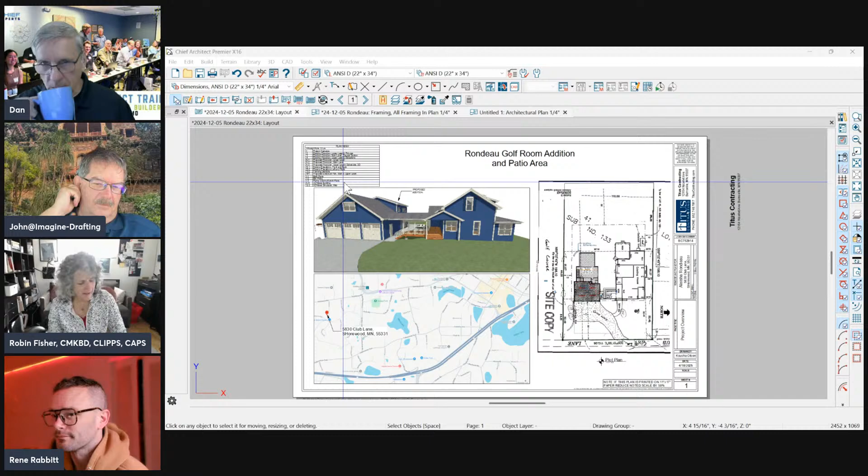All right, what's new with you guys? Robin, you're going to be updating the NKBA guidelines? We created the new guidelines and now we're going to be updating them. So that's going to be fun, I'm excited to get to do that again.

Nice. Rene, what's going on in your world? Just working on all my product stuff for X17. Have you heard anything about when X17 might be around? Not that I could say.

I do want to let you know I've been using your shower. Rene has a new shower system thing - have you used it? I have been using it and I really like it, so thank you, it's really cool. I'm doing two bathroom renovations right now and I started using it, and it's like, yeah that's really nice. I think I have to raise my rates again, you guys - it's making it too fast.

I'm interested to see when someone starts getting into something a little more custom than the out of the box ones. But out of the box, you can get them pretty custom. Cassie has them too, I wonder if she's played around with it. Give it a couple weeks, see if people start using it. That's one of those ones where I used it and I'm like, it can't be this easy, right?

Cassidy, nicely done, it's really cool, it's very nice, I really like it a lot. So thank you, Rene, cue that up and you can show that a little bit later, okay? Sure, yeah, that'd be cool.

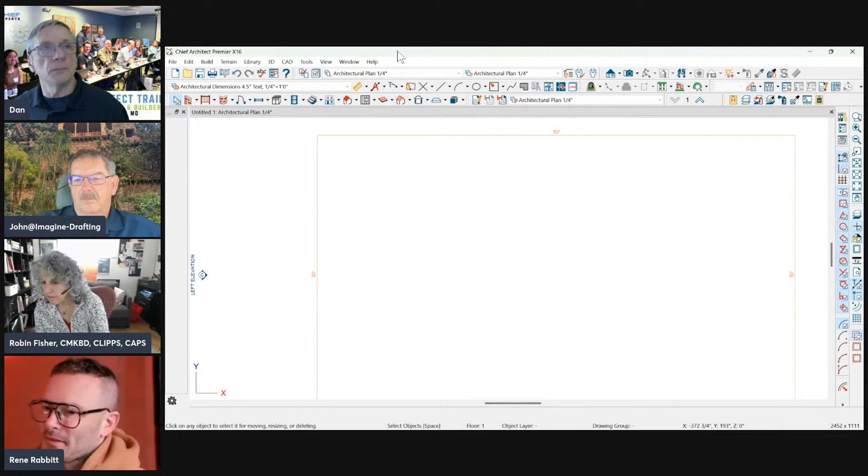So when you open this, can I interject on that? Absolutely. I make digital assets, I sell them, I have an e-commerce site. So yeah, I will tell you, it's really, really difficult trying to budget how many hours you're going to put into a development cycle of a new product, not knowing how many people are going to purchase your product for the next year, and if it's going to be a sustainable practice, or if you need to supplement that with some other source of revenue. So I think that the subscription model is extremely ethical and almost necessary.

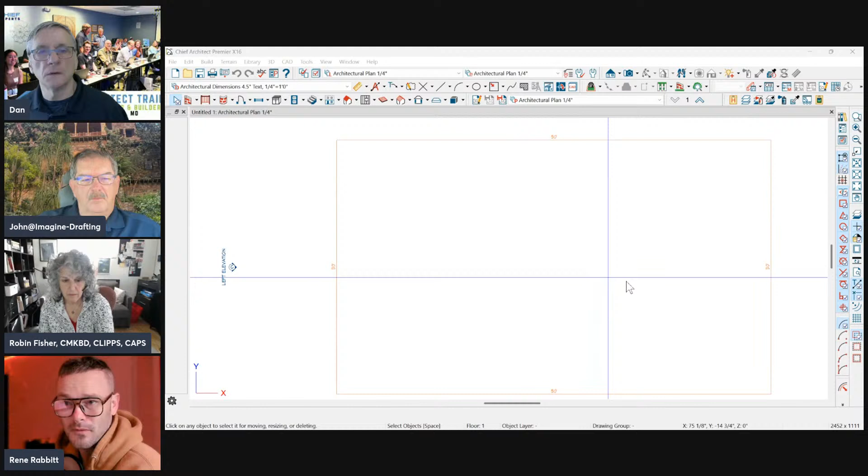And I'm a big backer of that because I don't charge a subscription, and it's a real challenge figuring out how much time I get to spend making my next products. Yeah, and you do make a lot of products. So yeah, you could just totally lose your butt on it.

So as a company grows, like Chief Architect's been growing, and they're trying to develop cloud-based stuff, which we've all been asking for, they need to know what's your user base. Anyways, carry on. As we all know, anybody that's been to their events and listened to their leaders and the people involved in programming, they've got one hell of a good company and a lot of great people, and they're really producing a good product. As far as we know, there's no indication that they're going to ever go anywhere. It's a privately held business. There's no reason to believe they're going to do anything else.

So let's hope that holds true, and we'll see what happens. In the meantime, they keep putting out a good product. So when you first load Chief Architect, you open it the first time and you'll see what's called the dashboard.

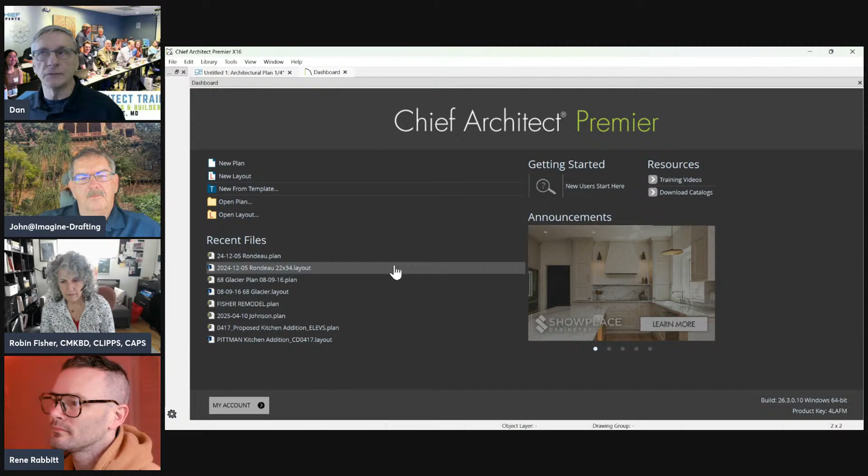This is a place where Chief gives a chance to put some information, help videos, training videos, things like that, or catalogs you can download, the symbol libraries. They'll show different things coming up with their announcements. So it's a good little dashboard to find out what's going on with the program. Plus, you can get to opening new plans and have a list of the projects you've been working on show up on the dashboard. You can adjust the numbers in the preferences of Chief on how many you want to show here, and whether the dashboard appears or stays after you open it. That's a setting in the preferences; we won't go there right now.

So once you get it loaded and open up a new plan, Chief has two kinds of files you're mainly working with: plan files, or .plan files, and layout files. They used to have them abbreviated from the old DOS days, but now they just spell out the whole word.

Just to give a reference for people using AutoCAD, and I know it's not for a lot of people here right now, but for anybody listening: a plan file in Chief Architect is what model space is in AutoCAD. So your .plan is the same as model space in AutoCAD, and layout is the same thing as paper space in AutoCAD. Just think of it like that. But they're two separate files, as opposed to being all in the same file.

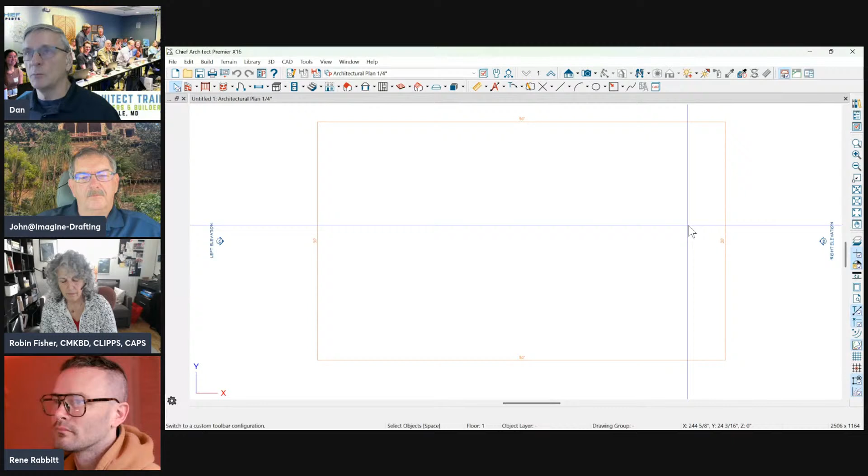And by the way, when I say Chief is a very full-featured, robust program, it'll go head to head with AutoCAD all day long, no problem there. So if you're an AutoCAD user and you want to get out of that program and just use Chief, we'll help you with that. We've done it with a lot of people. So don't worry about that.

So when you open the program, you're going to see some toolbars that look like this. This is called Chief's default toolbars. You'll have two rows of icons across the top, one row over here, a blank space down here, and a blank space over here, which will look more like this. It's going to be a little bit wider, I believe.

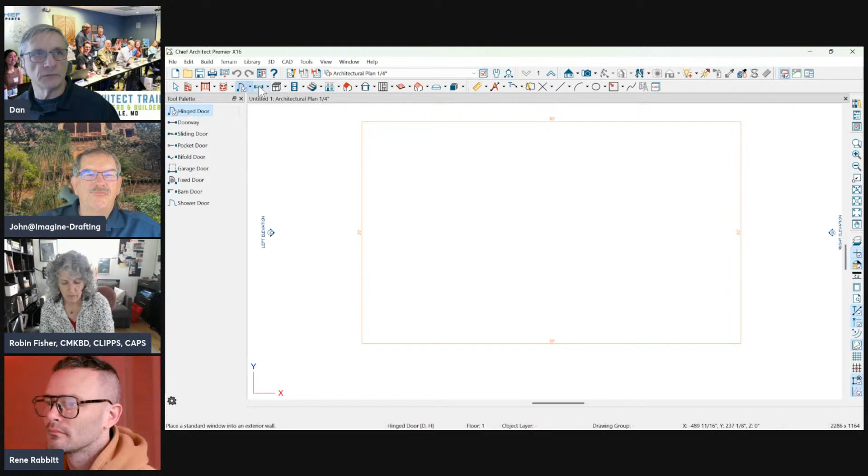So when you click on an icon, you're going to see what are called the child icons on the left side of the screen. We call them icons, or you could call them buttons, either way is fine. You'll notice you get different types of items showing up here on the left side. What I just did is click this little gear icon down here, and you can turn the words off at any time and just have a grid view, making it take up less real estate on your screen. So you can have it either way.

I like that Chief gives you that option. So if you're brand new to the program, it's a good idea to leave that list showing so you can see what the different icons are as you click on them.

I've set mine up in preferences to get a drop down. You may not have that out of the box. If you want to do the drop down setting, go to preferences—that's this little icon with a P on it. Then go to this setting where it's either child palette or drop down. I prefer drop down, but beginning users might want to not do that.

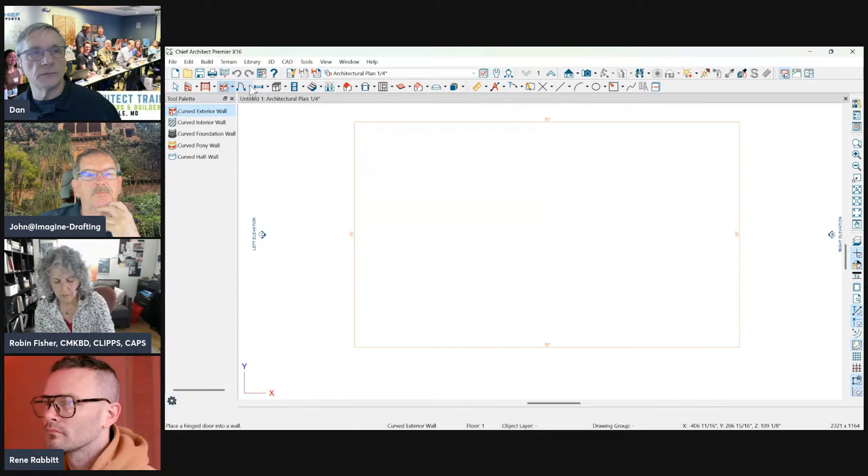It depends on your comfort level. The only difference between the two is that if you do the drop down and choose a different icon from the list, you'll see the icon change up here to match the items on the list. So if you're working on a plan and want to find a door and the door icon's gone, for new users that's a little confusing. But after you learn where the icons are positioned, it's not a big deal either way. So I prefer drop down.

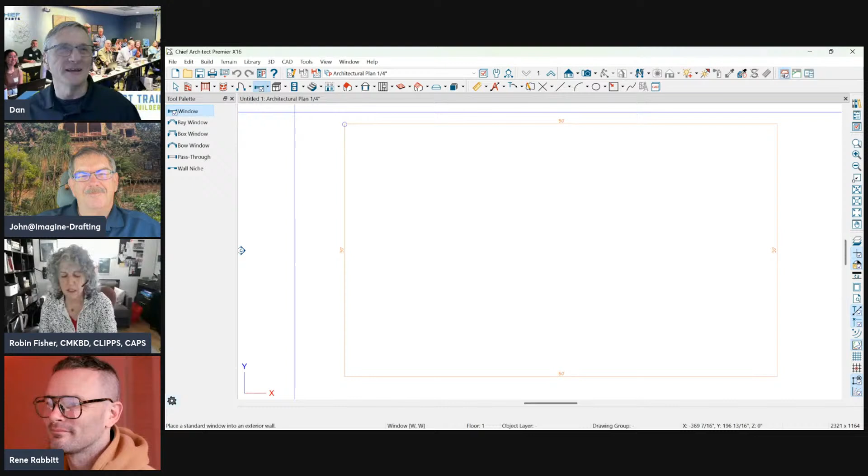So again, personal preference—that's why they call that little icon preferences. Keep that in mind. Preferences change how the computer works. It does not change how the plan works or where the drawing space is. It just changes how the computer works, how colors are, and how Chief works—not your computer.

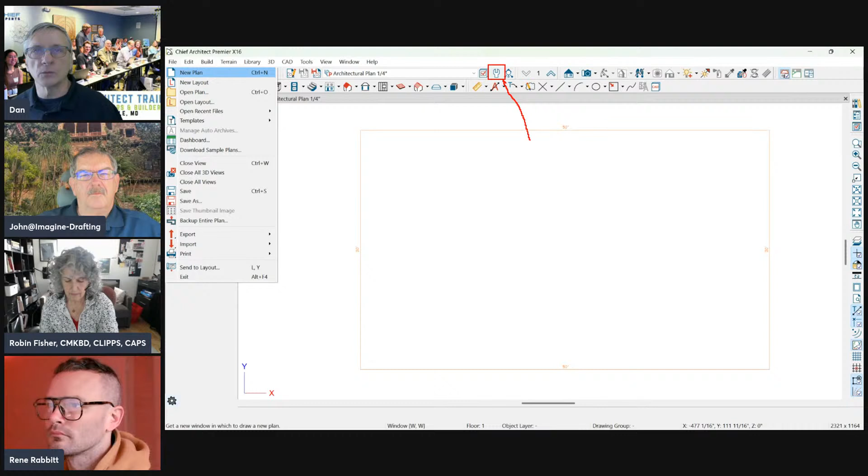It's how Chief works, but it doesn't affect the drawing of the project you're working on. So whenever you open a new plan in Chief Architect, whenever you go to File, New Plan or Layout, you're actually opening up a copy of a blank plan. In that blank plan you'll have a bunch of defaults set up. This little icon that looks like a wrench is a place where we can set up defaults for the plan we're about to work on.

Defaults would be things like what kind of cabinets do you want to put in, what kind of walls, what kind of siding, what kind of colors. All those different kinds of things are called defaults. There's a whole list here of defaults that we can change within the program, and each time you open a new plan, you're working with the defaults just for that plan.

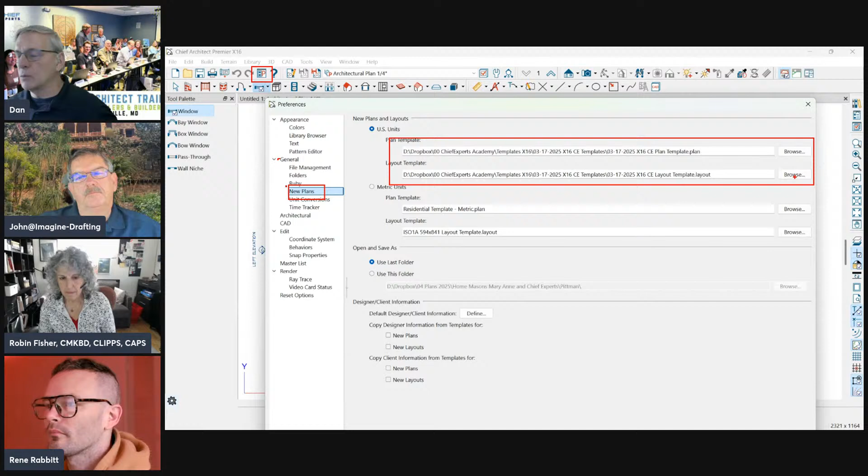You're not doing anything to the past plan, because a new plan is a copy of a previous plan, and that's set up under preferences again. It's really easy to see what you're working with when you go to preferences, under general, new plans. When you click open new plan or layout, you're opening a copy of whatever's listed here.

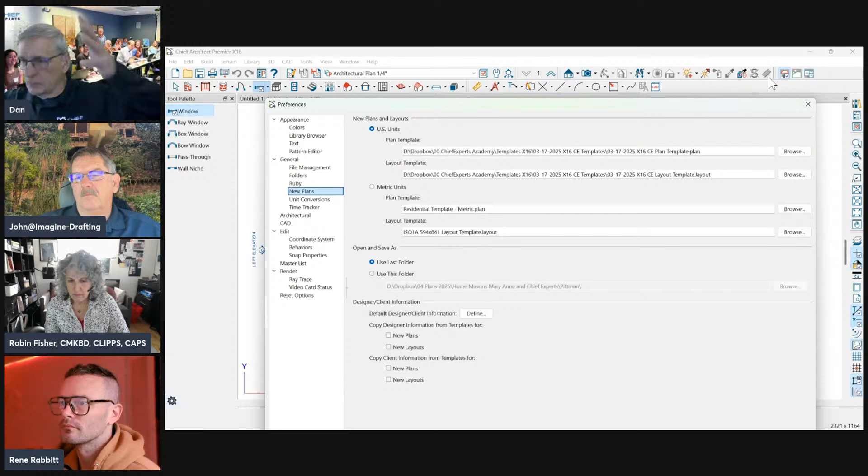So it's just like if you worked on the Jane Smith plan the other day and liked all the settings you had in it—you open that up, make a copy, then delete everything and start drawing. All the defaults are there, all the settings are there. You just made that into a template. That's all a template is. Templates seem to confuse people, as if it's some big magical thing, but it's nothing—it's just a copy of a plan with default settings changed.

So preferences affect the program, defaults affect the plan. Back to preferences for a second.

If we click on this little icon, a couple of things I like to teach new users right away: we want to get used to using the mouse the way it should be used in Chief Architect. The number one thing is you use your left button to click and draw things. Number two, you use the right mouse button to select things and draw things. You could use both buttons, but if you get used to the right mouse button to pick things and draw things like walls and lines, it makes it a little easier. So we're going to turn on this little setting right here.

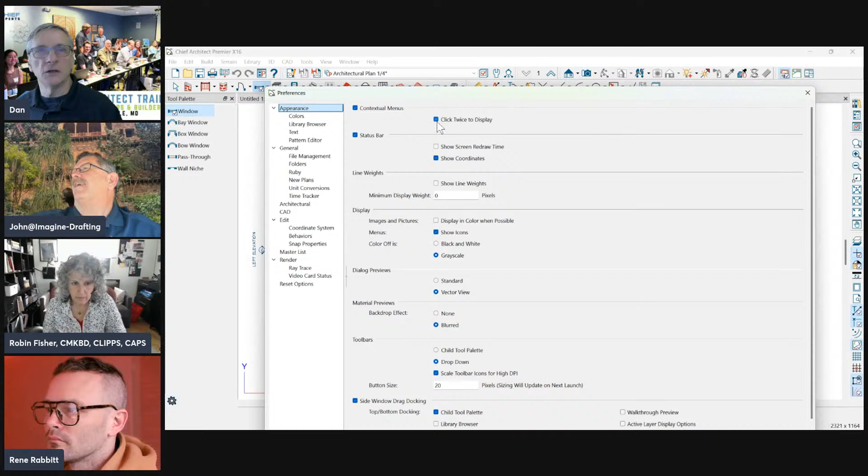Click twice to display under appearance, and when you do that and start drawing and click on something, in Chief the right mouse button is called the pick button. It's used to select things in your plan.

So when I open a plan, let me open the one I just had open here. When I want to select something, I can just click on it with my right mouse button, and I can pretty much select anything I put my cursor over without having to change and select a different mode to click on. So if I'm in window mode working on windows, I can only left click on existing windows or left click to place a window.

But I can right click on anything at any time. So if you get used to using your right mouse button to do that, and then click twice to display, it gives you what's called the contextual menu. This menu is the same as the icons at the bottom of your screen. So we right click twice to get to this menu.

I don't use that menu very often because most of the time when I select things, you're selecting it to dimension it, to move it, to delete it, to copy it, to do things like that. Sometimes this menu gets so big and it's in the way, it's just extra work to use that menu. But if you're used to using it, keep using it by all means.

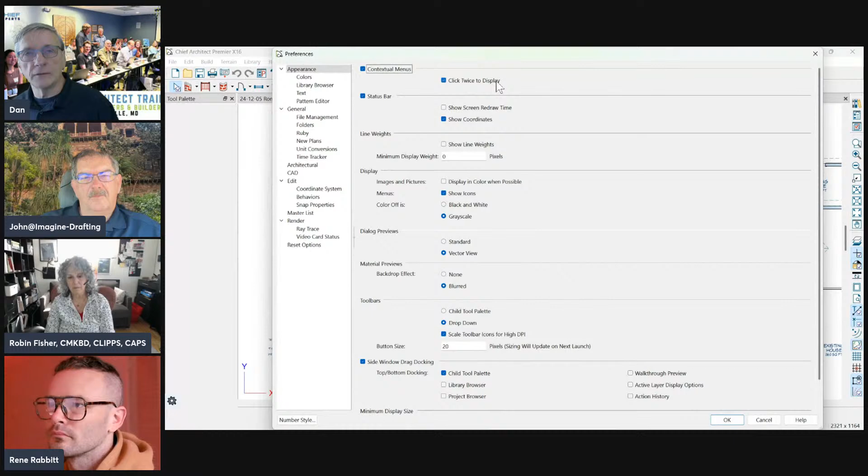So that's the one preference I like to have my students change. Button size - if you're using a real high res screen like a 4K or 8K and your icons, the buttons are really tiny, you can change the size of them to fit your screen better. Just make that a bigger number. You'll have to restart Chief to do that.

But you see how I have all my buttons kind of fill the whole screen here. And if you get them too big, they'll flow off the screen and you'll get these little double arrows. You don't want to do that because then a lot of the icons are hidden. So make it just big enough to fill your screen.

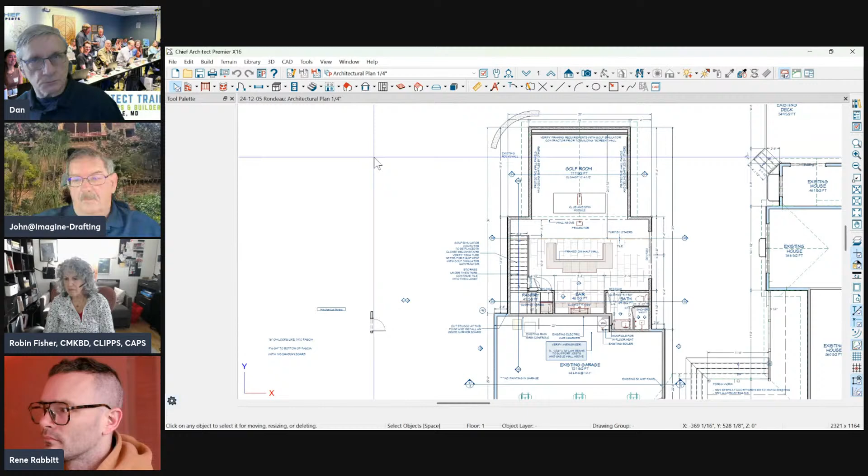Another quick thing here is colors of your handles, and this will be the last one I cover in preferences today. These colors right here are called the handle colors and the fill color. Then we're going to go to edit and change the handle size. So those two things make it easier for a new user to draw in Chief.

So let me just close out of here. If we go open a new plan, when I click on something, you see I get these little handles all over them. My handles are a little bigger because I've changed the size in preferences under edit to a 6. I think usually it's a 4 when you open Chief. I've changed it to a 6.

All right, try a 5. I have people go up one number and it's usually a little better.

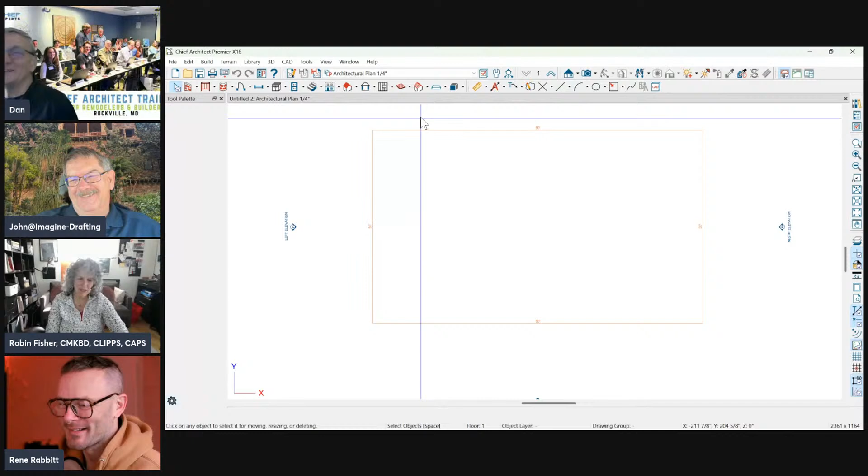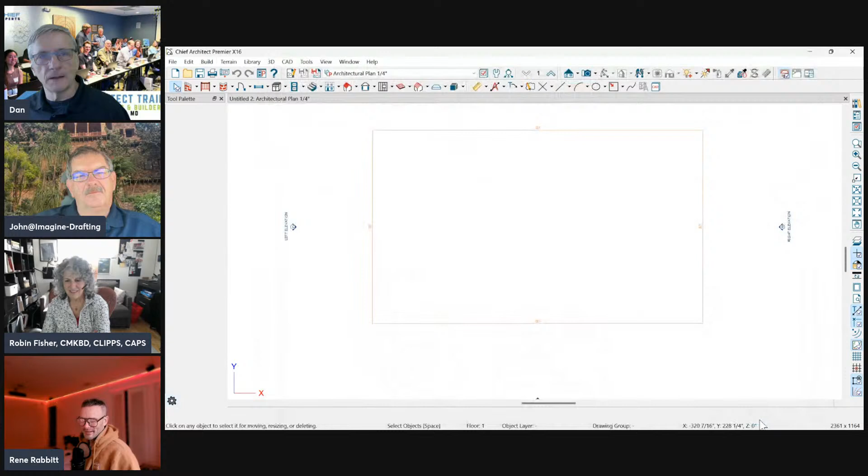And I change my colors all the time to different colors. Why does that not surprise me? You're a colorful guy, I do it too. I change it based on my mood - sometimes greens, sometimes purples. Yeah, I get bored, you want them to be pretty. You could always do the different colors here too, do the custom themes, although those are horrible - that won't affect the handles, but some people, if the screen's too bright for you all the time, just change the theme a little bit, or you can change different parts of it too. Yeah, their provided themes are pretty bad, they're really ugly, they're hard to process. Yeah, I tend to just run with the default theme. That way everybody else in the world that I'm showing Chief to is probably set at that too, so it's not confusing people.

All right, so in the toolbar setup, another thing I always have my students do is I have them right click on an icon.

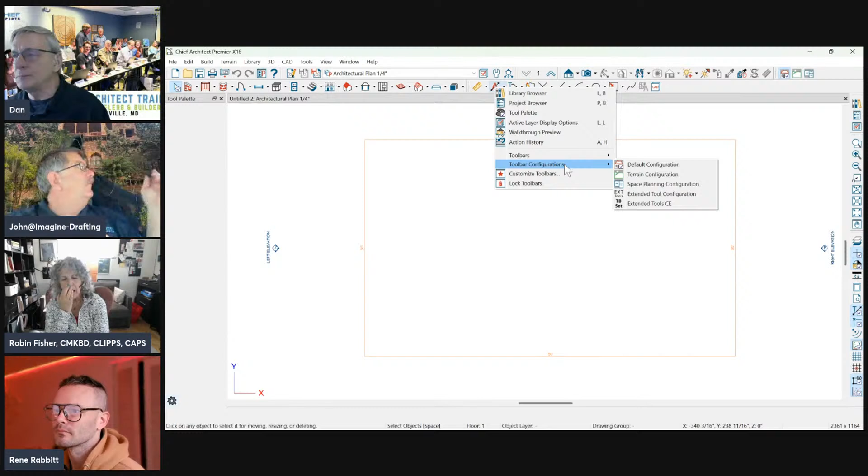I know Robin's going to say she uses this toolbar because it's more basic, and I agree with that. It is more basic, but I don't use that one. I've modified it, I have my own. I've kept some of the tools you add on it, and added more tools that I use on a regular basis. But that's not the thing we want to do for brand new users of Chief.

So I'm going to switch to what's called the extended tool configuration. You right click on an icon, go to toolbar configuration, then extended tool. I've created my own extended tool, and the only thing different between mine and Chief's default is I've added these icons that I use all the time. We'll talk about that another time. Just choose the toolbar extended, and it gives you more of the icons you use regularly.

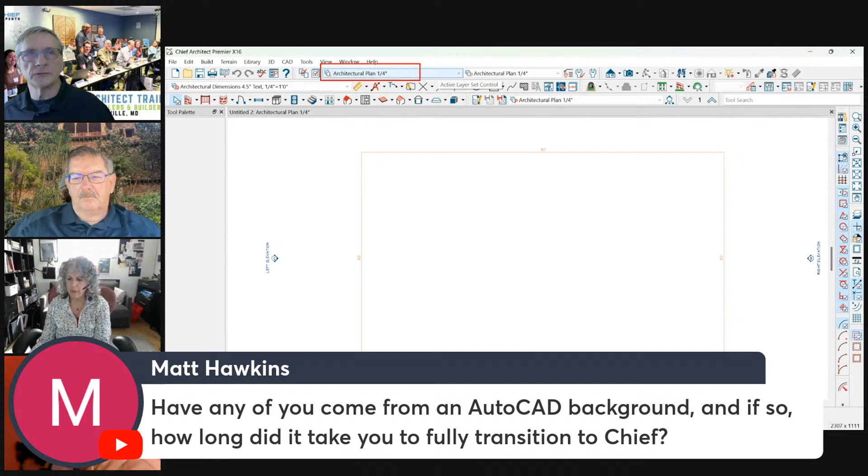It's going to eat up a little screen space, so your real estate will be a little less, but if you get used to this system, it works pretty well. The thing I like about it is it gives us these three drop downs: our plan views, defaults, and layers. We'll talk about what those are in just a second, but these are the things we use to switch around in our plan to do different things.

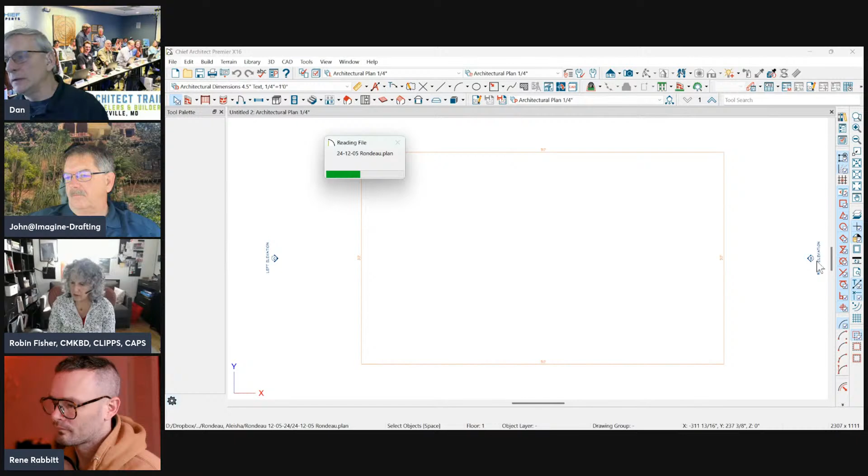Now with those three things in mind, let me go open up a plan again. One of the things I think is really confusing for people is they get into Chief and start working on things. Ben, mute yourself, you're clickety-clacketing.

One of the main things to understand about using CAD software, and this is true for any CAD software, is you're going to draw your entire project in one plan file. You're not going to have different plans, not going to draw the footprint of the house and make a copy to add the electrical, then make another copy to add the framing notes and details. Everything gets done in one plan file, so as you update things, everything stays part of that file and you're not messing around with different files to get different results. So keep that in mind.

So here I'm just clicking through the different kinds of views in my plan. I'm going to work on my architectural plan where I add notes and call-outs, then I want to work on my electrical plan, then switch to my framing view. We keep everything in the same plan file, which makes it much easier to get the project completed. In our layout pages is where we assemble all the different views we're creating, and that's where we separate out using the different plan views.

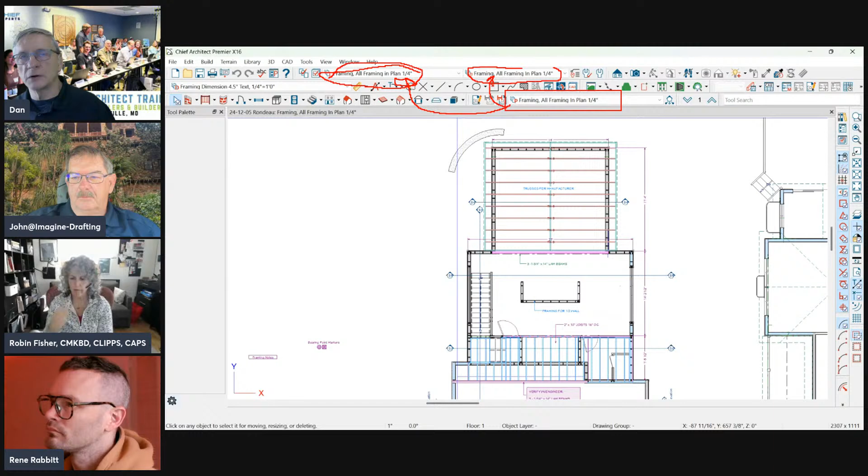So plan views control your default settings and your layers. Layers are what you see on the screen when you're working on something. Defaults are the things you put on the screen, like text, dimensions, notes and things like that - that's the default settings. This is kind of the control panel to control that. We'll get a lot deeper in our classes about how this all works and how you set up your own plan views.

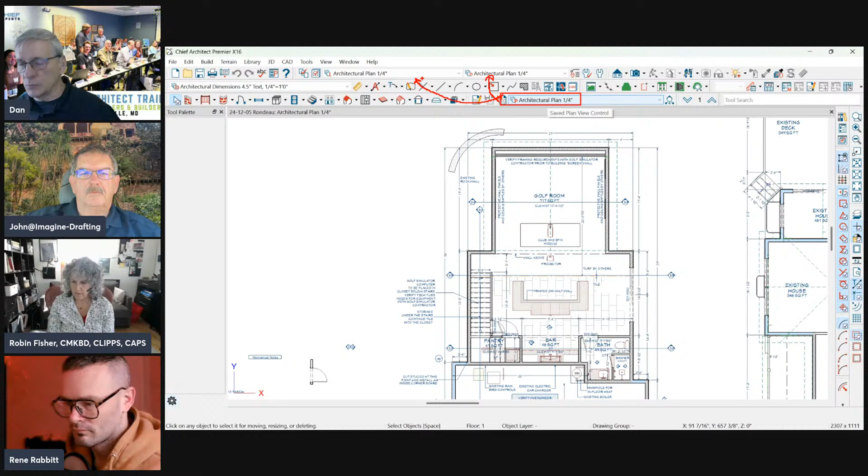But they are very confusing out of the chute. If you simplify it, these are the pages I'm going to print, and it's just a control panel to switch these two things so that's what I'm working on at that point. It's really quite simple when it comes to it, but that simplicity is one of those things - you get the light bulb moment and go, oh, now I get it. It took me a while.

When they first introduced plan views, John, it took you a while too, didn't it? It took you like over a year or better. Well, I fought it. I fought it because I just wanted to use these two things. I thought plan views were an extra thing that wasn't necessary. So I fought it, but then one day it just hit me like, oh, now I get it. And it's like, okay, so we're all over plan views now. We're going to use it. I love them, they work great.

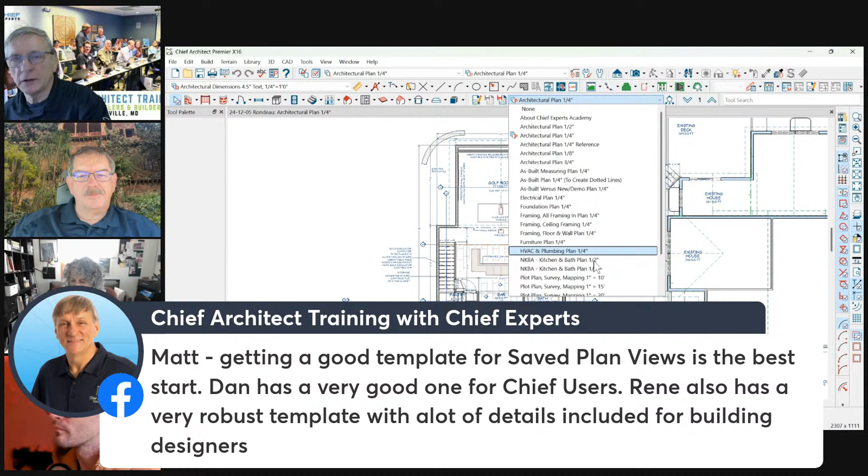There's a lot of things we could do with our plan views to create the kind of plans we want. The template I'm using right here is something I've worked on over the years, and John's helped with this too. It's very simple, it covers 85% of what you're ever going to draw. And if you ever need to do anything else, you can make those different views. So it makes it really easy to work with.

All right, let's get started here now. Let's go open up a new plan again. I'm in my extended toolbar. We've got the icons at the top of the screen to draw things, and we've got the tools right here at the bottom row. These are the things we're going to draw to the building, to make it look like a building.

We've got the icons right here to add dimensions, text, and to do our CAD drawing things that we're going to add to our plan. We're going to use those icons a lot, that's the main thing. We've got these three icons, which I hope to check on here a little bit - I think I talked about those last time we did this. Then you've got your libraries, project browser, and layers right here.

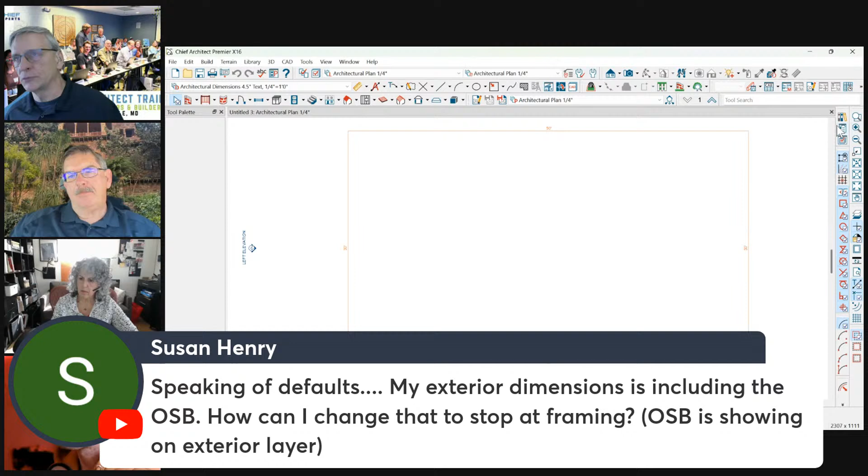Just think of these as on-off switches. So that's going to turn my libraries on. I float my libraries out on my other screen - let's see if I could redock it here. Not going to redock. Let me just go to preferences.

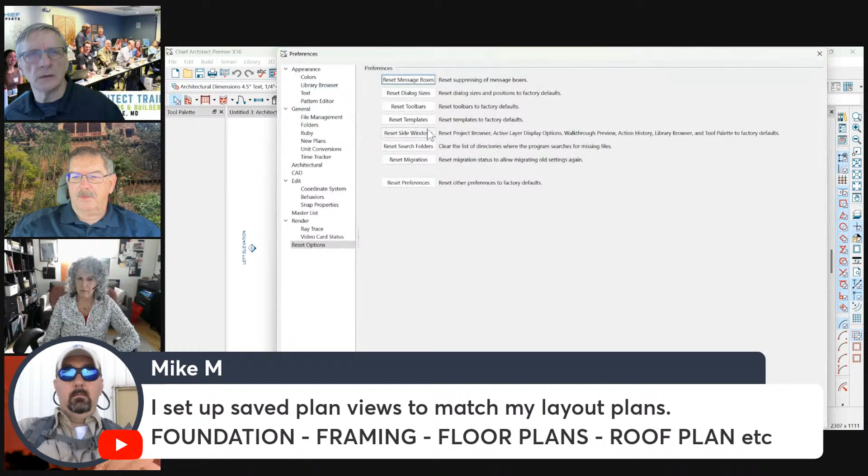If your side windows get messed up, we could go in here and hit reset side windows, and click OK. Now when I click on these things - oh, do I have to restart Chief to do that? Reset side windows - yeah, I got to relaunch the program.

Let's get out of Chief, let's come back into it. Now my side windows will be back in place. I just like my side windows floating, so I don't have them, so I have more real estate to work with. But here's the thing - those three buttons turn those side windows on and off.

Project browsers are something we get into in our beginner classes because you really want to use them. Your libraries, all the different things that you can get from Chief, are right here. I always recommend when you're in your library, switch to this icon at the bottom here so that when you're clicking on things in Chief's libraries, you're going to see more things listed here in the bottom.

If you hold your control key down and roll your wheel in and out, you can zoom in and out on this bottom window to show more things on your screen. It just makes it a lot easier to see what's going on. This just displays a list, so it's a lot harder to see, so use the buttons down here. All right, so there's my side windows.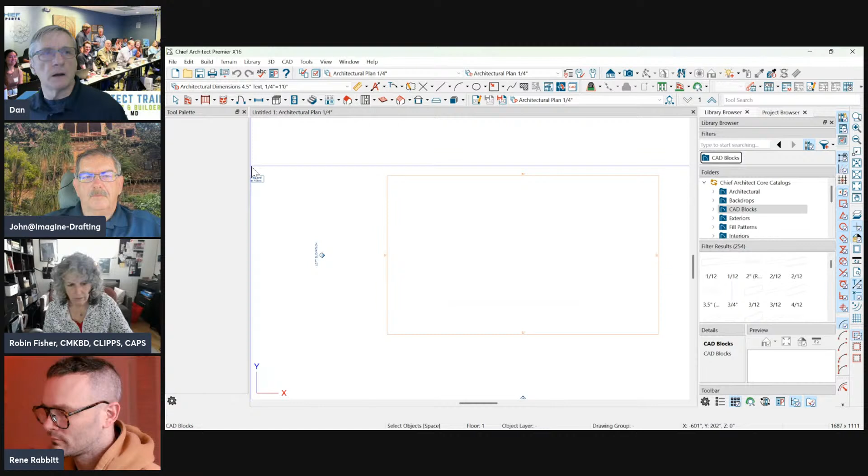Dan, we have a question we're just itching to get the answer to. So can you draw 4 walls and put a dimension on it? You want to do that? Is that why we're here? That's what we're doing, yes. Yes, we have a question that needs to be answered. Yeah, we have a big question.

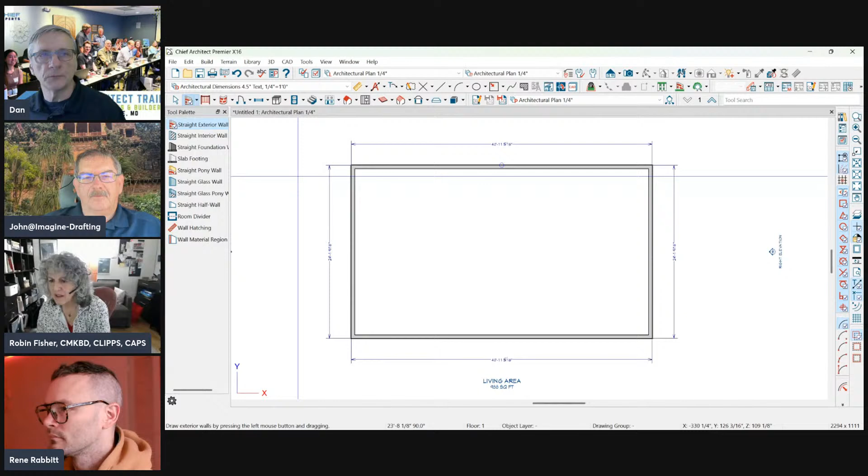So you notice what I just did there - I drew 4 walls, and I used my right mouse button to do that. So try that sometime, use your right mouse button to draw things. All right, what's the rest of your question? I'll pull it up right now.

The question is, the dimensions are going to the OSB layer instead of the framing layer. And they have the dimensions set up correctly so that they're going to the wall dimension layer. So we need to show them how to reset that. You can change that in the wall itself.

When you go open a wall dialog, the only way you're going to dimension the sheathing in this example is to go into the wall type. So you click on the wall that you've drawn, open its dialog, go to wall types, go to define, click down here and go to wall properties and look at what's called dimension to the exterior of what. Make sure that that's got the stud selected, not the sheathing.

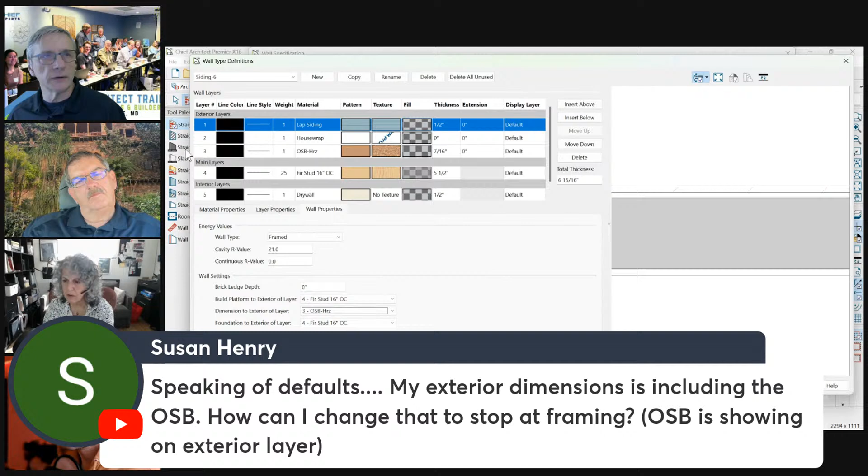So if I switch this up to the OSB right now, which would be this layer, it's going to be the outside of that layer. And this is the outside - the top of this screen is the outside of the wall. Click OK and OK, and now my dimensions shift to the sheathing. The other thing to keep in mind, if the OSB is on the main layer, it's still going to go to that too, isn't it?

No, I don't think you'd want your OSB as part of the main layer anyway. The main layer should typically be your framing. The framing is what the frame, the main layer is how Chief joins walls together.

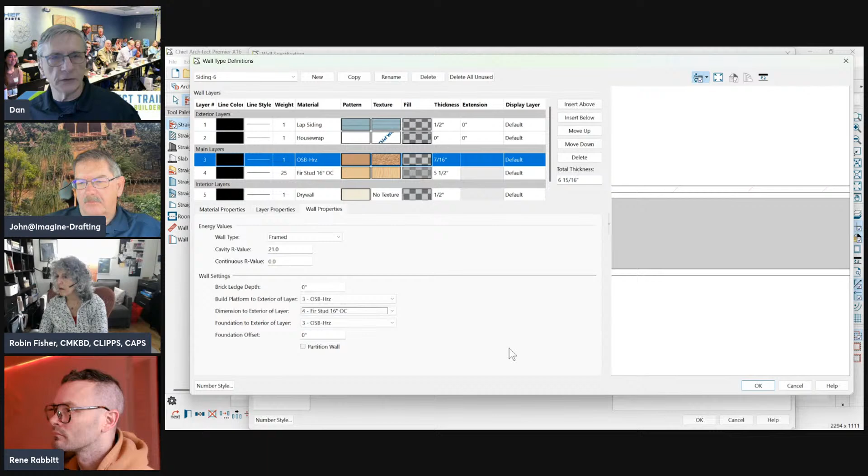So if I move this down into that, I'll set the dimension back to my framing. So that was the exterior layer of the fir stud. It's going to say you probably shouldn't do that, but I'll do it anyway. But now when I do an interior wall, let's see if it joins up properly.

Okay, yeah, it's working okay, but sometimes what'll happen is the main layer will join up with the wrong part of the wall. So the main layer is joining the main layer here, but because there's a main layer there right now, it's joining fine.

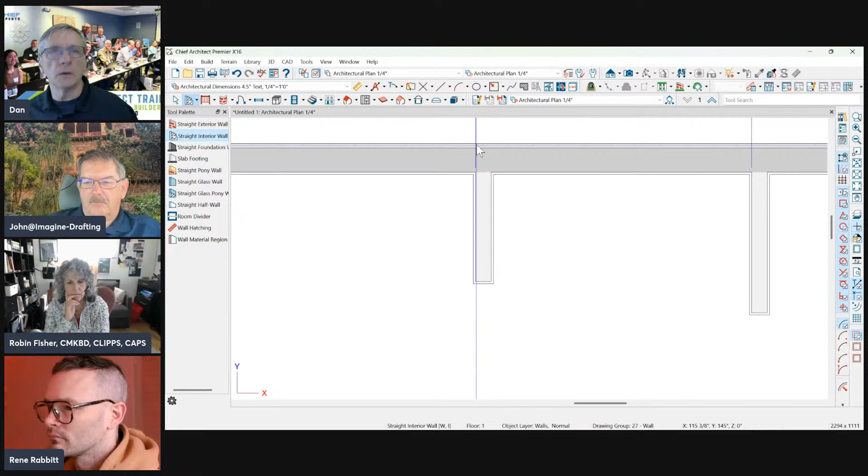If I were to go back in here and define this, and let's move that down. Now I click OK. Now we're going to see the interior wall join up. Thought it would, yeah. See how it joins up to the sheathing out there? Even though it doesn't show it, it's actually going to that part of it. So just be careful, your main layer should always be the framing layer.

So it sounds like she has it set up right. And it's still doing it, Susan? Yes, that's what she just said.

Right, so what are some other reasons why it would dimension to the OSB instead of... Is the OSB the outside layer? Yeah, so OSB, is there an OSB and then siding? In other words, the surface of the wall? Yeah, the only other way you could do that would be dimensioning to the surface.

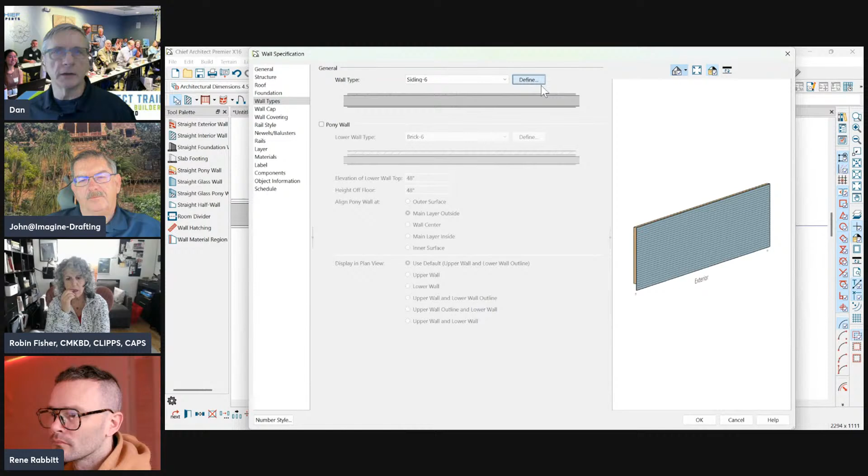So let me go back in here. I got to set this, define this property back to fir stud. Thank you. Okay. All right, yeah, if it's dimensioning somewhere else, double click on the ruler icon.

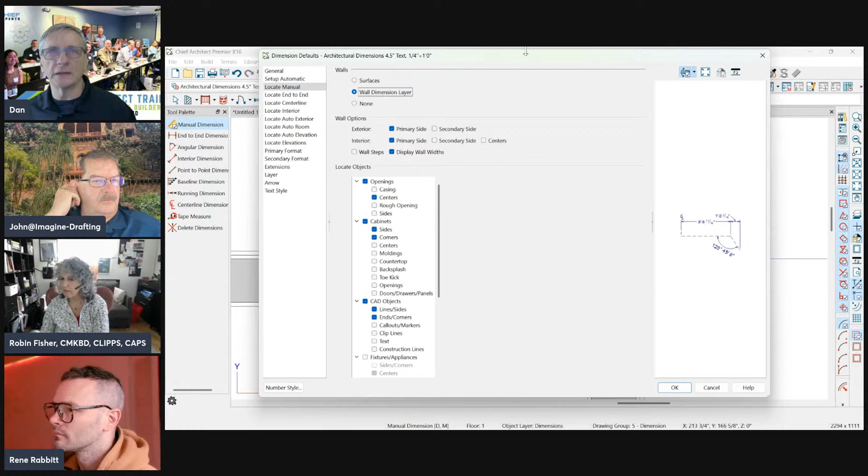This is part of the dimensioning in Chief. So the hardest things in Chief to do right away, there's three main areas of Chief that we cover right away. We cover laying out the rooms and getting the 3D platforms in place. Then we talk about stairs, and we talk about roofs. Those are the three most difficult areas of doing things in Chief Architect, especially when you're just getting started.

So dimensioning is one of those things used to lay out walls. When I double click on any ruler icon, it's going to open up the defaults. Look at the wording up here, dimension defaults for this kind of view that I'm working on. If it's set to surface, your dimensions will go to surface.

Of course, I need to reset the automatic to go to surface, which would be locate auto exterior to the surface. I don't think there's any other way to define a layer of a wall for a dimension to go to, other than in the wall dialog. So here I'm getting new dimensions going to the surface of the wall.

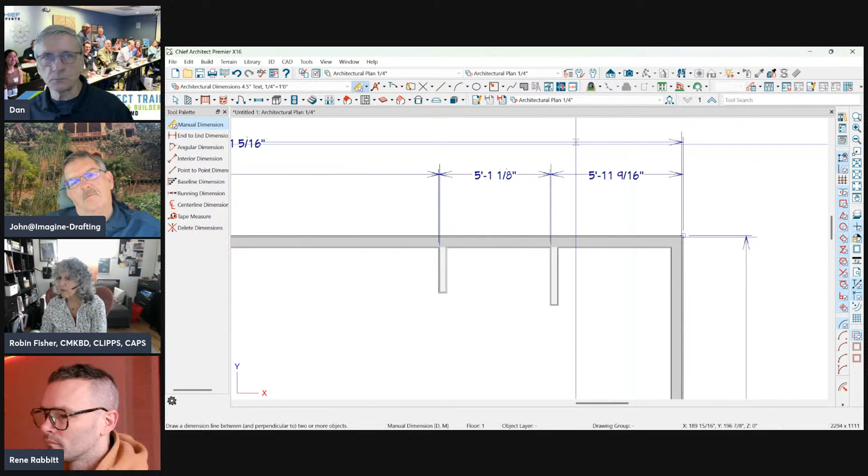Just by double clicking on the icon, we can roll down this list here and we can select to change to surface any of these dimensions that we're working with. So let's come back to those dimensions. Did we get an answer on that? Is there another layer? Not yet.

Another question would be what dimension tool are you using? I'm using the automatic dimension tool. Right, but if they're using point to point or something like that, they might get it to the OSB surface. Yeah, it doesn't change it.

I've had clients that will use what's called the point to point dimension tool. This is not the tool you want to use to dimension your project. That's only used to dimension areas that are odd angles and things like that. It'll work okay in this situation when I'm snapping to 2 points. And it did snap to the surface here, and I could move that to different parts of the wall.

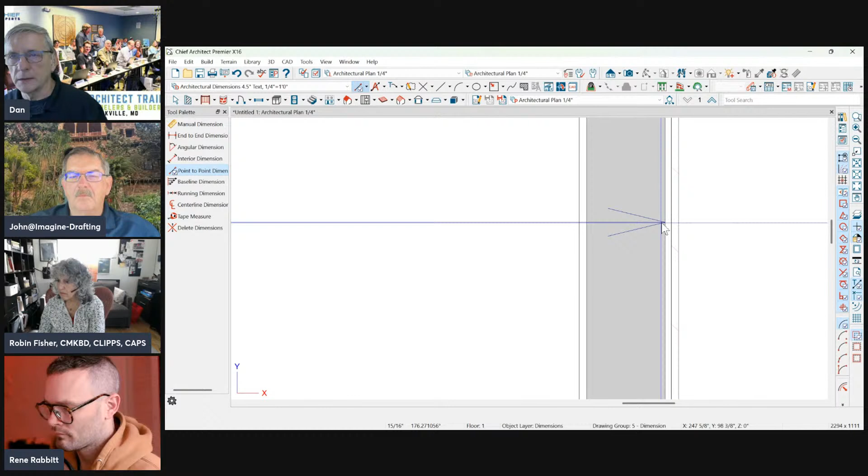I can't move it to that sheathing layer because that's not part of my main layer, but I can move it to the other parts of the wall. The other thing you could do with this point-to-point tool is dimension it right in the middle of the screen, and it's going to leave a point that you can move and set that on things. So Chief will use that sometimes when it can't attach a dimension to something.

Exterior layer with siding. The OSB is the exterior layer with siding.

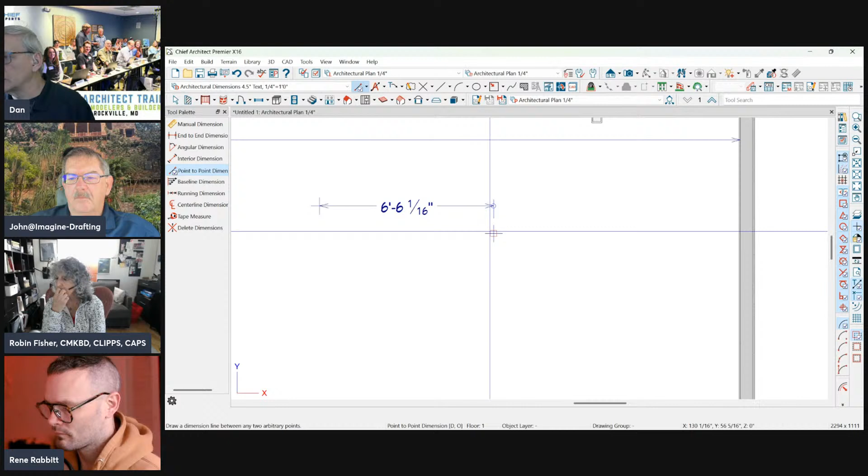The only thing I could say is to have Susan send me that plan. Let's see what's going on. Susan, if you want to email your plan, I'd be happy to look at it. Dan@chiefexperts.com.

I know no reason why it would dimension there if the settings in the walls are set right. Make sure you go to your wall and check it's not set under wall properties to the wrong defining layer. Make sure your dimension to the exterior is not set to the sheathing.

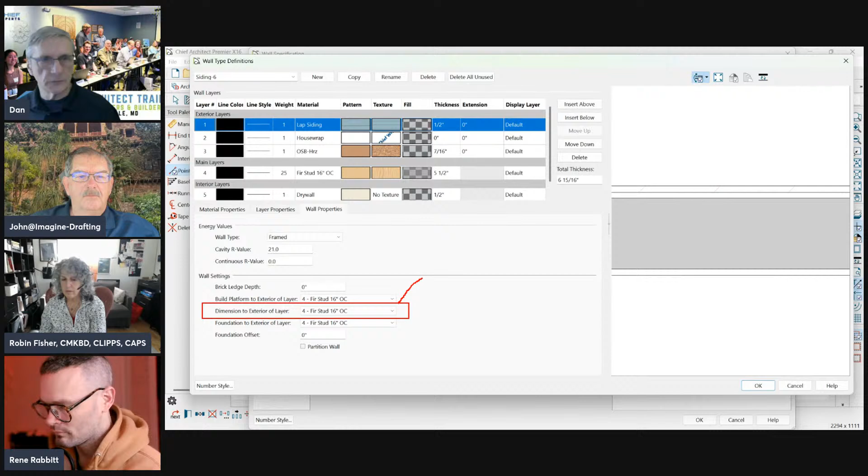Make sure that's set to the framing. I don't know of any other way we could get a dimension to snap to that sheathing automatically. I can't think of a way.

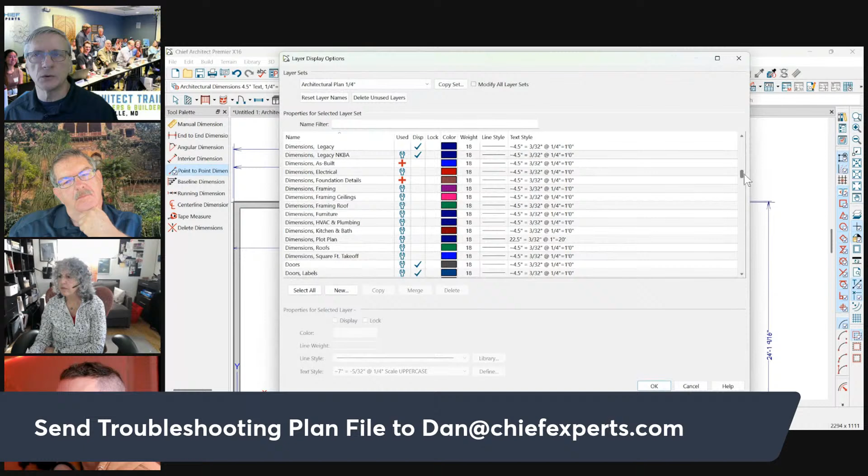Well, what about on the framing plan? Does it show on the framing plan? Does it show the OSB? Well, no, it doesn't. If you've set the layers to show main layer only, that's going to look like this, but it's still not going to show the sheathing. Although, unless the sheathing is in the main layer area, then it could show that.

Could it? Hold on, let me see what it's doing. So then does it pull just to that dimension? I don't have my dimensions all set for interior, so I'm all screwed up. Let me change that to get to the outside. Okay, oh, there you go. That could go to sheathing.

If we move, I think if you have a framing plan, yeah. Nope, it's pulling to the sheathing still on a framing plan. Okay, yeah, even if you have it. All right, well, it's still pulling to the sheathing. It's not pulling to the...

She's going to send it to you, Dan. Yeah, send me your plan, Susan. Just email it to Dan at Chief Experts. When you email it, make sure you close Chief before you send it, so that it actually clears the memory and sends out.

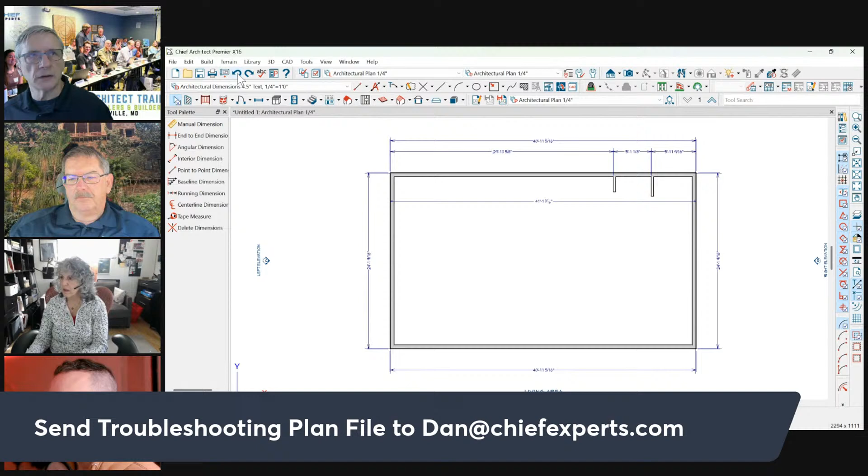Okay, let's just go back here and lay out some walls real quick, and talk about the process that you go through. Oh my God, we're almost out of time already. Just crazy. All right, let's just do this.

Let me just delete what I've got here. So whenever you're laying out a project, you're going to choose the kind of walls. The goal here is to create a project that has the walls you're going to build the house with. So if you're doing 2x6, use 2x6 walls.

Again, I'm going to just lay out a couple of rooms here real quick. I'm just using my right mouse button. It's much quicker when you use your right mouse button. So I'm just dragging, letting go, click, click, and I got it laid out.

So the automatic dimensioning is turned on. Again, if I double click on a ruler icon, it's going to be under locate setup automatic, and this auto refresh button is turned on. You could turn that off just by trying to delete a dimension, or come in here and uncheck that. If it did get turned off, you could come back in here anytime and turn it back on.

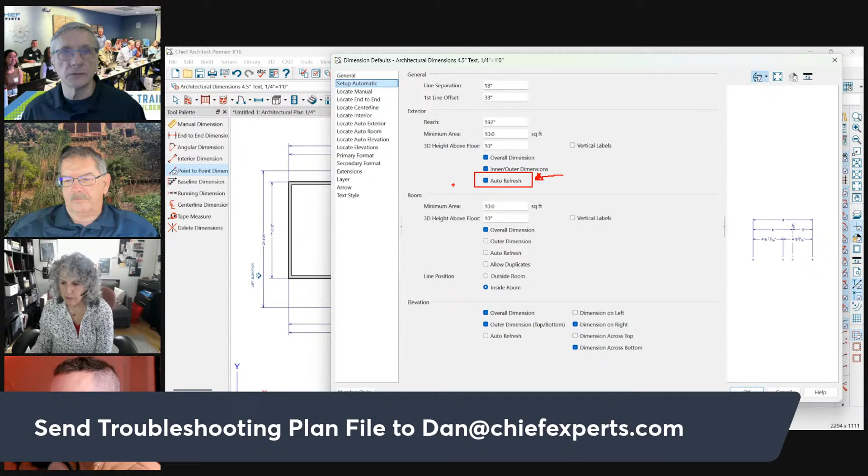So it's a nice way to get started on your plan when you're just starting to do things in your project. The next thing is, you don't dimension by moving things into place. You don't dimension by looking at the dimension when you're drawing walls. I mean, you can, but you don't need to do that. Just sketch out the shape you want, and then let's go ahead and start resizing it.

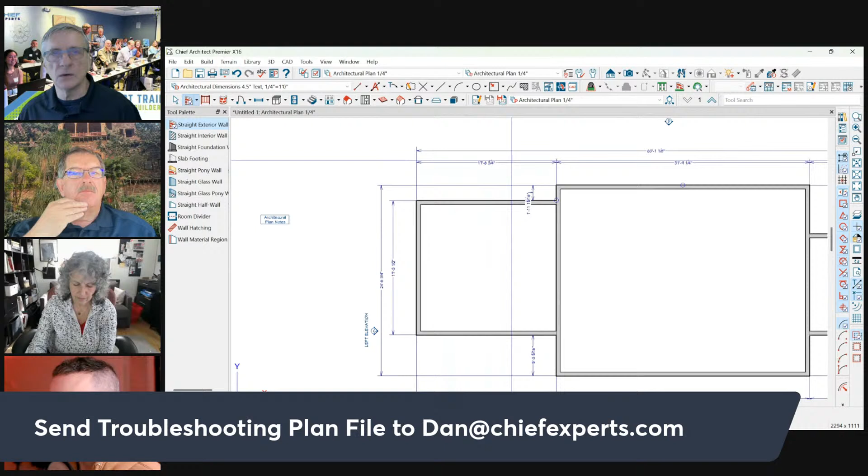So the idea here is I could click on this wall and click on this dimension, and I could say, make that wall 18 feet. I'll make it 20 feet. Okay, and you'll see I got a little icon here that shows it's going to move this wall to the left. All right, so there's that.

Now, if I click here and I go here, look at the icons you get now. You get different icons, because now it could move this wall, or it could move this wall, or it could move them both.

Left wall, right wall, or both at the same time - you want to watch that when you're clicking on a wall in front of a dimension. What I tend to teach people is, okay, I want to change this number - I've already set this for 20 foot. I'll change this one by clicking on the wall and clicking on that number, then typing in the number I need. You put in the foot sign - you don't have to ever type the inch sign. So I want that to be 12 feet. You just work your way around the plan, clicking on the item you want to move. I've already got that one set at 12. Let's move this one to 14 feet.

Talk about what you just did, because you did your dimensioning differently, didn't you? You didn't select the wall you wanted to change - you selected a different wall. Well, yeah, I clicked again - I'm clicking on the item I actually really want to move. I want to move this wall back and forth, so I'm clicking on that and changing that number. Here I click this wall and change that number. Here I don't need to move this one because I already got it where I want it. I want to move this one by clicking this number. Now I want to move my bottom wall by clicking either this number or this number. Let's click on that and make that 30 feet.

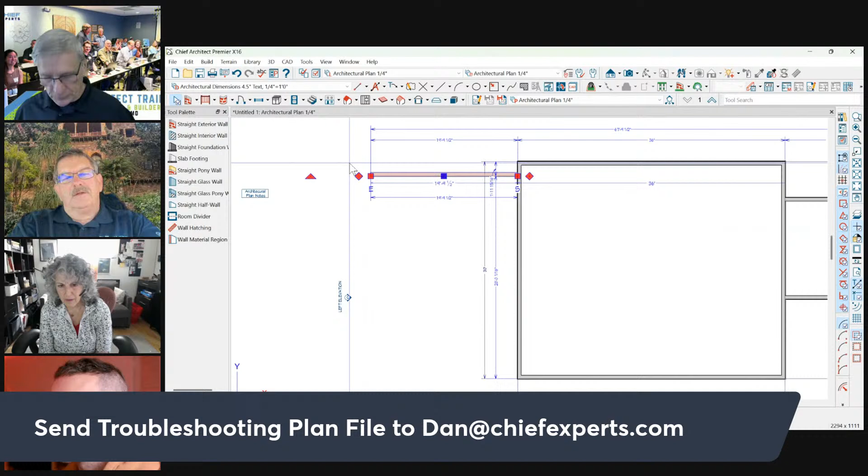Now I see how I'm getting my numbers nice and clean, no fractions. Let's get this one straightened out - I want that to be 20 feet. So, and I didn't type the foot sign in, so therefore I got 20 inches. So let's go 20 feet.

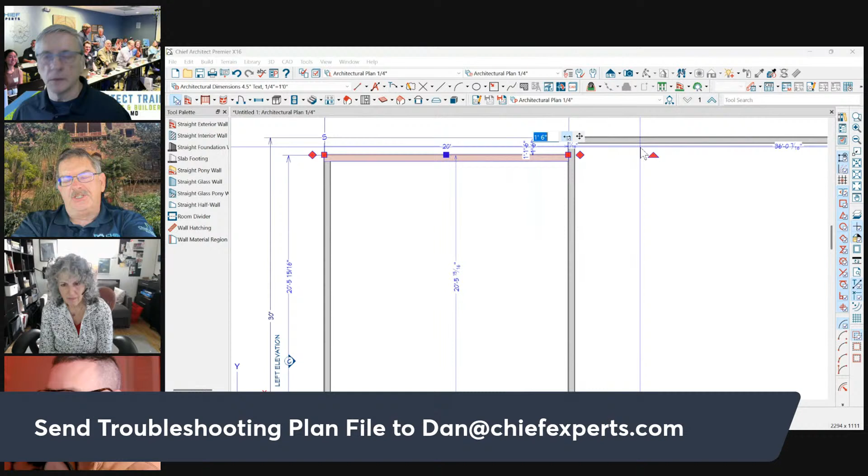I think it's really a good idea - Dan, this is probably one of the biggest things you could teach a new user, is to dimension their walls into place. Yeah, otherwise they're going to get their whole plan done, and then realize their dimensions aren't exactly what they want them to be. They're going to be off a quarter inch, and then they're going to change them, and then their roof is going to be wrong, and their windows are going to be wrong, and all that stuff. So do this at the very beginning. One of the big things that gets me when we work with a lot of people and they send us their plans is if the roofs are done and now we need to move some walls because there are fractions all over the place - we have to move the walls separately.

So hang on here - Susan just sent me her plan. Let's do a little quick troubleshoot.

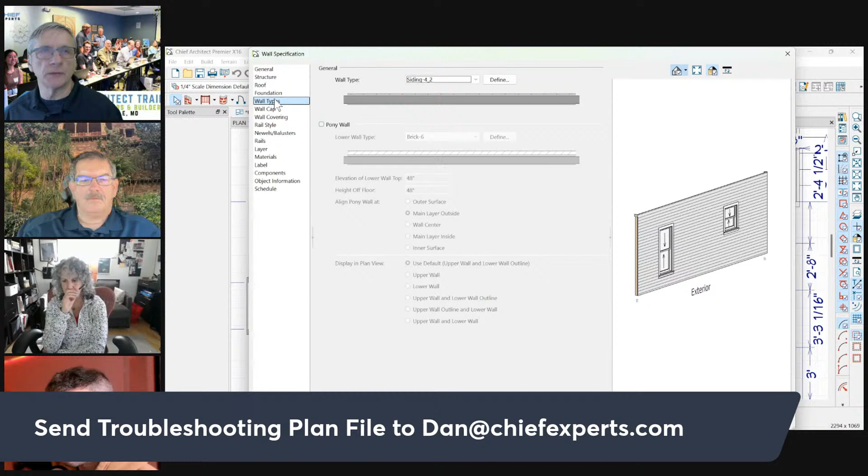The other thing too, when you're dimensioning your walls, work in one direction - I always tell people to work in a clockwise manner. Yeah, go all the way around in the clockwise manner. And I always change my exterior walls first, then go in and change my interior walls, but always work in the same direction. Don't start going all over the place because you'll never get it right. It's a good rule of thumb. As you get more proficient with Chief and understand more of what's happening, then it doesn't matter, but when you're starting out, that's a really good rule of thumb - just go in one direction around your plan.

So your wall setup looks good - you got 3.5 inch framing, you got your OSB here. If I click on the wall properties, we've got it set to build platform dimension to the framing, foundation to the framing. So this is all set up fine, I don't see any issue there. Let me turn the grid off - I don't like the snap grids. Everything's dimensioning to the framing.

So either it changed on my computer, which it can't, because I think she moved them. I think she moved them. She must - look, they look good. You can click on a dimension line, click on the dimension line itself, and you can also click on these little extensions. Now I could pull this extension onto the wall and I could see that it's dimensioning to the framing.

So Susan, this looks fine if you want to dimension to the framing, right? Not to the sheathing. Okay.

Dan, can you turn off the dimensions quick, or delete them and redo the automatic dimensions and see what happens? Sure. I'm just going to highlight the ruler icon, hold my shift key down, and draw a marquee around that. It's going to get all your dimensions.

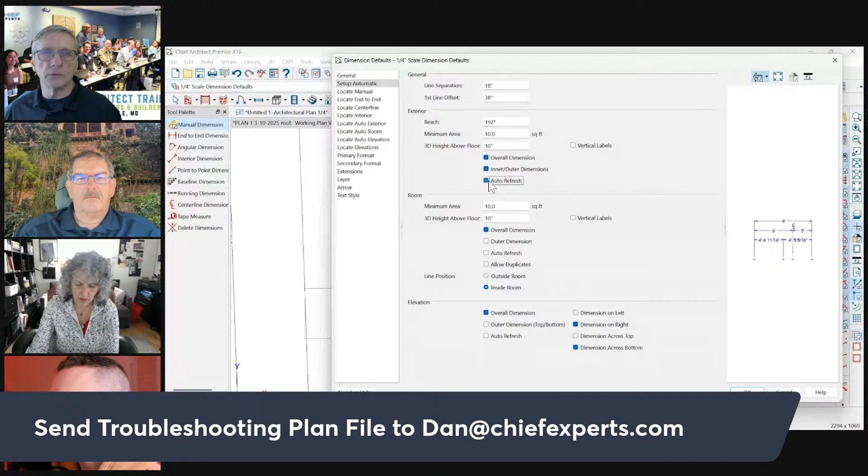Now I deleted all the dimensions. I'm going to double click on the ruler icon. I could either turn them back on to auto refresh, or just hit the auto dimension icon right here. Either way, I'll turn on the auto refresh. It's going to get us a lot more dimensions, going to the framing. So it looks like it's doing just fine.

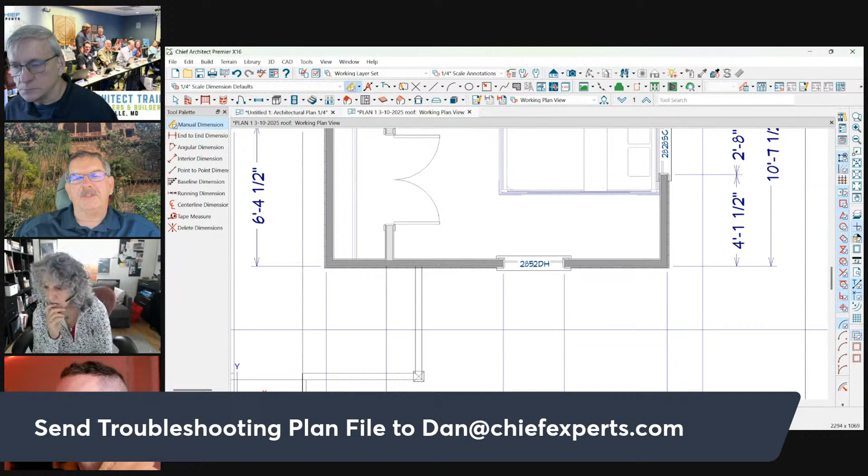And so we're missing something here, Susan. Turn the grid snaps back on and try it one more time. Auto dimensions won't hit the grid snaps, will it? I didn't think they would, but yeah.

That's the only thing you changed since you got it, right? Just off the grid snaps. Let me just go ahead and delete the dimensions again. This time I'll use this auto dimension tool, and it's going to framing again.

So if I zoom in there and pull that line on there, yeah, looks good. Go down to the foundation once and see what's going on.

I wonder if the walls are aligned properly. We're getting different dimensions. I wonder if the walls are aligning with the OSB. The foundation walls are aligning with the OSB, and that's why it looks like it's doing that.

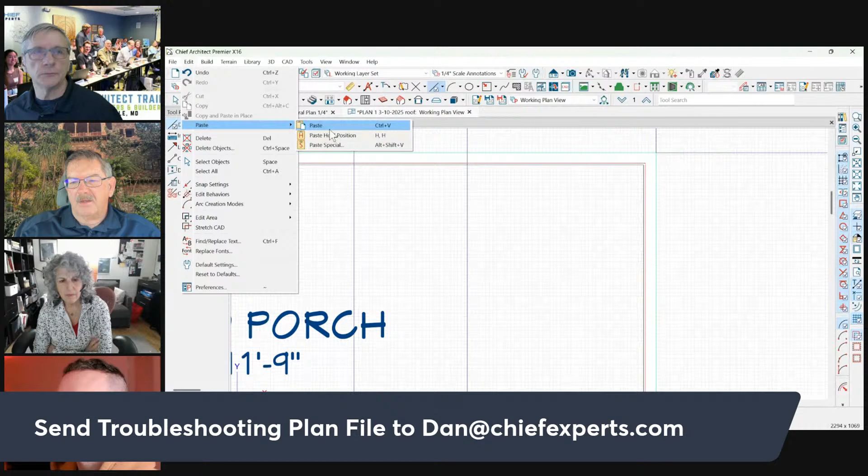You could go look at the wall types and see what that's doing too. Edit, paste, hold position. So it is lining up with... oh, that's the wrong thing I'm looking at. Yeah, it's lining up with the framing. Absolutely, you can see because it's a blue line, that means it's lined up with the framing.

She says the left wall wasn't aligned, so maybe that was the issue. That could be. Okay. Good question, though. Those are the kind of questions, if you're not sure, ask. I mean, why not? Yep.

We don't have much time left, so let me just cover a few more things about dimensioning. Anytime you add something to your plan, again, I've got the auto dimension set on. So I'm going to put some windows in. I'm going to make that 8 feet from the corner. I'm going to click this window and make this one 8 feet as well.

So again, you have to type the foot sign, you never have to type the inch sign. You click on the item you want to move, then click on the dimension number you want to change. At any time, you can add dimensions to things and remove dimensions.

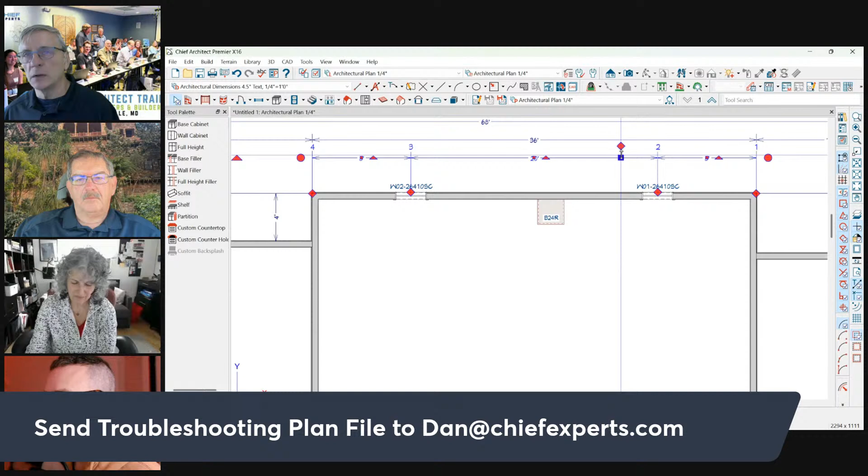So let me show you real quick how that works. When you click on a dimension line, you'll see you get these diamonds here. You got a diamond here, and one in various spots, you got one on the window here. So you can move those.

Now, when I do this, because auto dimensions is turned on, it's going to say oh, now you need to turn that off. Okay, I'll turn it off. So now I can move these points to different spots.

I can move it to the outer framing or outer wall. I could move it to the framing, center of wall, center of framing, or center of the entire wall, or interior of the framing, or interior of the wall. So you got 1, 2, 3, 4, 5, 6 snap points on a wall like this.

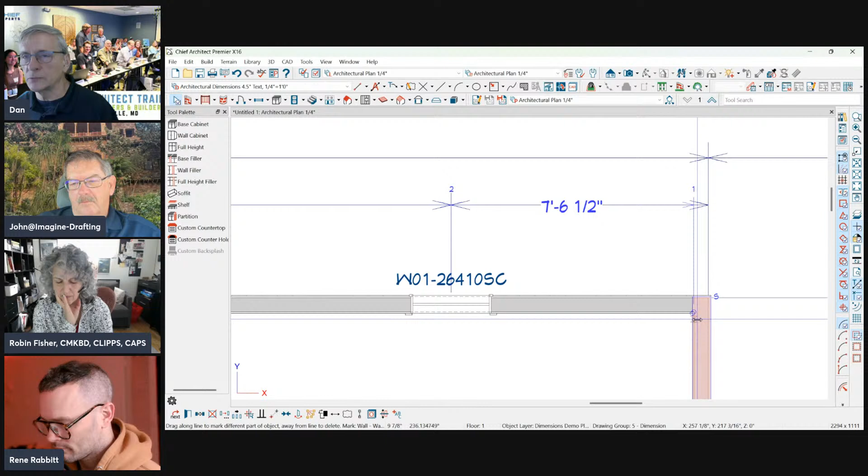On an interior wall, you're going to have 1, 2, 3, 4, 5, because that's if you have the same sheetrock on both sides.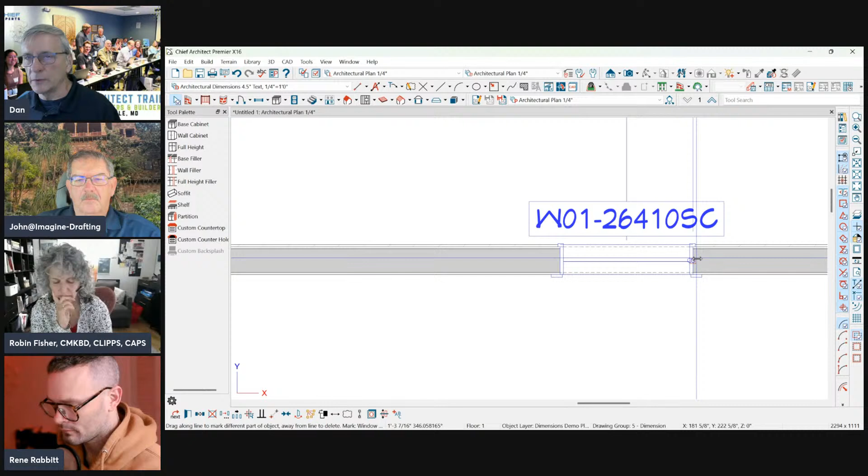Same with windows, you can click on the dimension line, grab this handle, and move it to different spots on other items. I can move it to the casing outside, casing inside, frame, or center of window, or rough opening. There's also a rough opening set snap that you can move that to, and you could position those wherever you want them.

Okay, I got another dimension there. The other thing you could do is at any time— why is that not going away?

You can also add dimensions using this button right here. Click that and set it where you want the dimension to be added. So I want to add it to the frame of the window, to the center of the window, to the edge of this cabinet. I want this cabinet to be 7 feet from that edge.

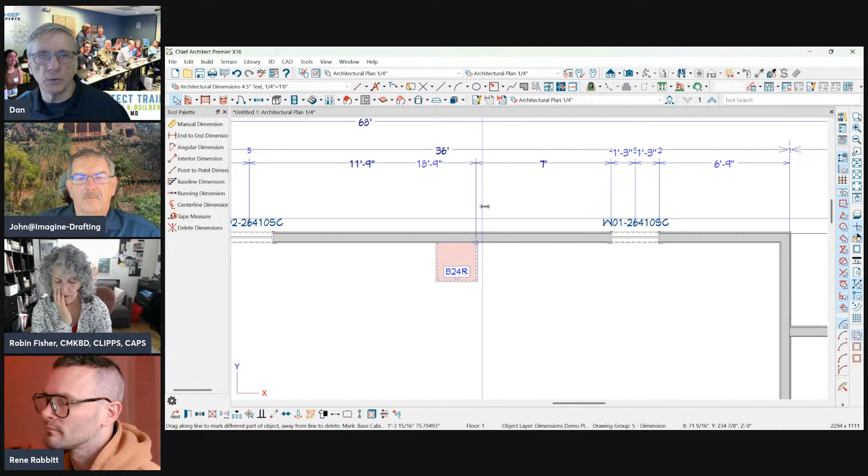So you can easily add and remove dimensions. You can pull points off of things to get rid of them as well. That's what these handles are for. Wherever you click, you're going to get a diamond, and you can set that diamond on things in your plan. A lot of people miss that.

The other thing you could do with windows and doors is, let me draw an interior dimension here. I like using interior dimensions a lot. So when I'm doing things, I'll go like that, and then I want to dimension this window. I'm going to add 2 dimensions here, one to each side of the window.

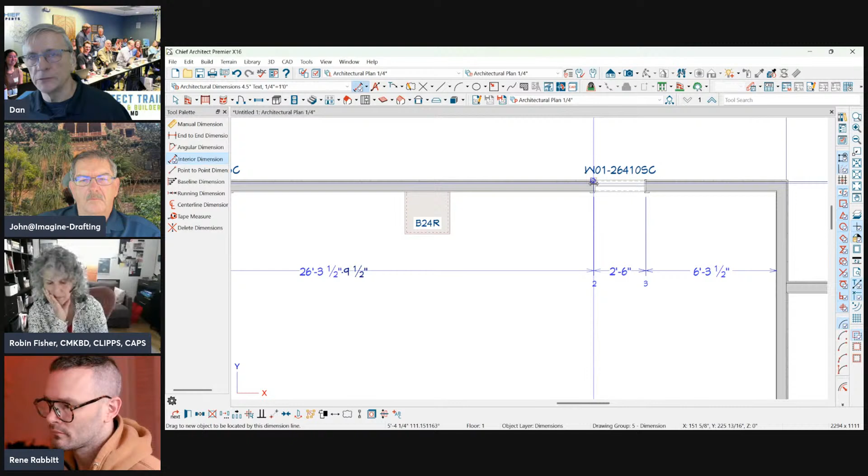I could take this first one, and again, it's going to the outer part of the frame. I could click on this and say I want that window to be 8 feet from that wall. Now I could click on this again by clicking on this handle right here. So I've got this one where I want it.

Now I want to change this one to the right width. I could click on that, and you see how you get the highlighted handle right here. Now I could click on this number and change that to whatever I want the width of the window to be. It's a great way, when you're doing as-built drawings, to add your dimensions to those windows: click, move one side, then move the other side. So you can click on either side of a window or door to change the width.

All right, that makes some sense. We have 6 minutes left, Dan. All right, what do we want to talk about real quick?

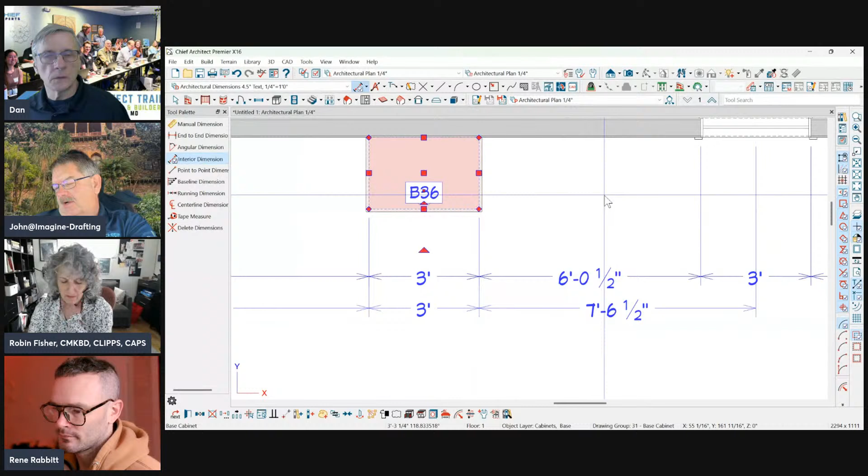Did you want Rene to show his cabinet stuff? Yeah, we could do that. And I just wanted to mention to Susan, it's about her wall being misaligned. That happens to everybody. It does. Keeping walls lined up is kind of a pain.

And I noticed that we could do the same thing to cabinets. I could click on an edge, but it doesn't turn the handle to a selected edge handle. See how with the window you get the selected edge? With the cabinet, I could click here and click on this number and change that side of it to a different size. I wonder if that's something Kevin would get all fired up about if he were here.

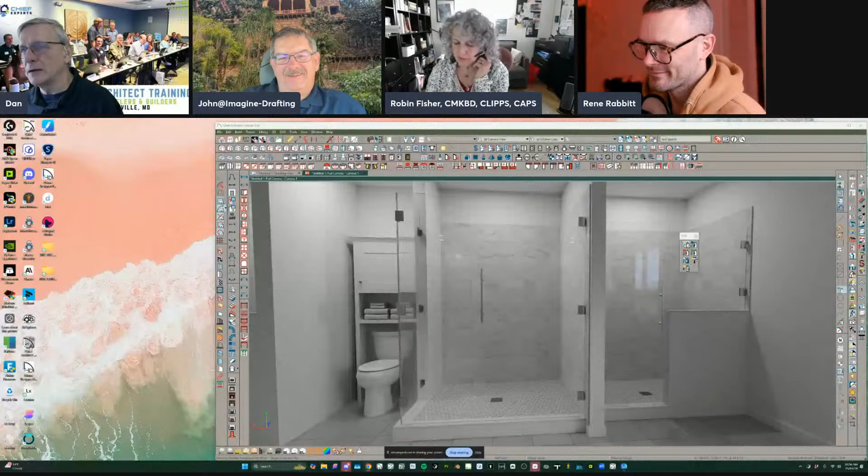There you go, Rene. Yeah, why don't you, since we're almost out of time, and I always forget how fast an hour goes, and it goes quick. I mean, yeah, we didn't even get close to what I wanted to talk about. So, I built a showroom, by the way. You built a showroom? That showroom. Nice, I built a showroom while we were talking.

Speaking of beginners, I feel like this is one of my few kits that really can work for beginners. It's a bunch of pre-made showers that are built on the cabinet tool, but you don't need to know that. You just get to know that you can click and place something and resize it.

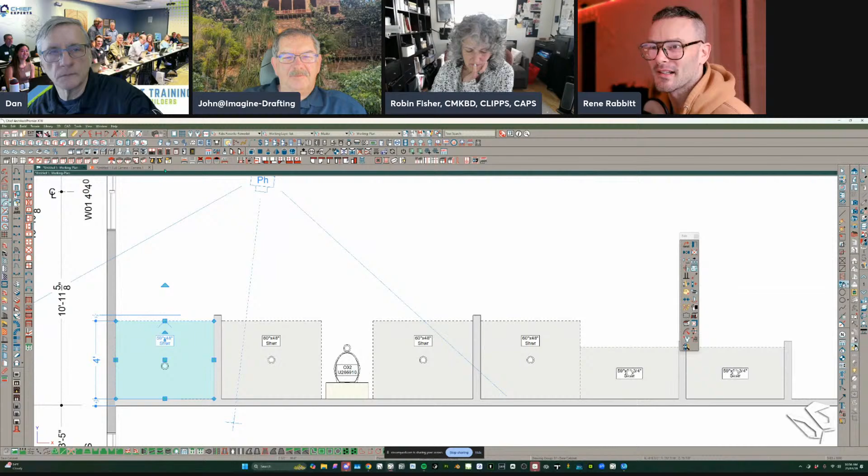I'll just resize this guy, and it's just as simple as that. It's gonna kind of bump out. So I give you, I think, 18 different types of showers, some of the most common showers. Some of them have integrated partition walls.

So here's another cabinet, and I get to drag this down, and you're going to see that this wall is actually part of that shower assembly. Nice for just clicking and placing, and dropping a toilet on the other side would be a simple way of doing this. If you're unfamiliar with this program, that little bit of fuzziness is because we're in a ray trace view to make these look really realistic. So that's just ironing out the view.

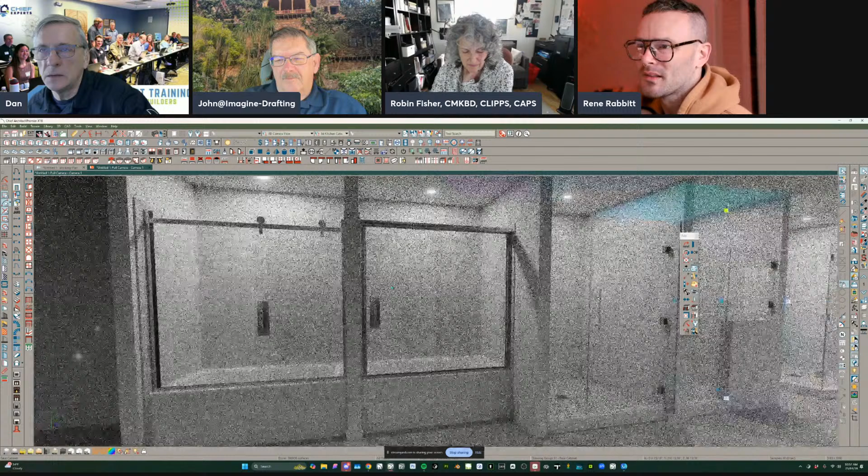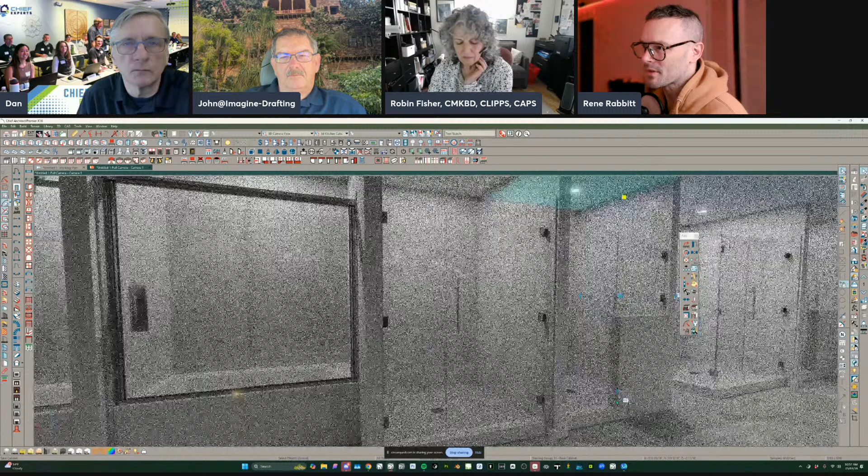I give you all kinds of different configurations as well as components in case you need to change something. The nice part is that everything is color coded. This is something that's more difficult to do in Chief without this kit, like getting the wrapping of the material as it wraps around the half wall. One side is tile, one side is painted drywall, both paintable surfaces, as I show you here.

These are more of these showers in the kit, but all of them come looking like the ones we just previewed. I've just painted different components to drastically change their look very quickly. It just means you can paint different elements of this, and it's all just one contained cabinet, so you can make some really ugly showers really fast.

Rene, the next question is, how can someone get that kit? You can go to my website. I don't know if we have a banner for it built up, actually I think I do. I can find it. Let's see, it's not that one. Here it is, there we go. And this is my One-Click Shower System, or One Minute Shower System, is what it's called.

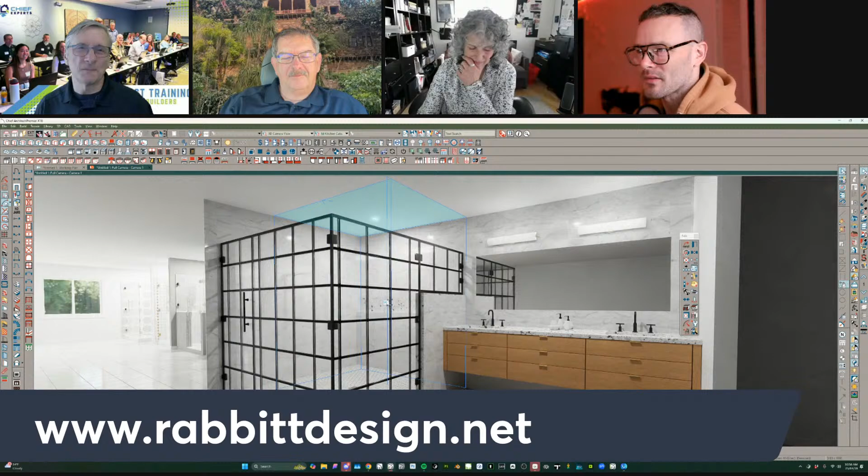I bet the guys on the call would never guess how Rene created these showers. Let's see if anybody figures out my favorite tool in Chief Architect, let's see if anybody comes up with the right answer. Really nice tool to pop those showers in quickly, it's really cool, very cool. You've done a nice job. Thanks guys, you keep excelling Rene, keep it up.

So Erin has a question or a comment. Yep, maybe we should cover it a little bit. Mike got the answer right, modified cabinets. Yeah, there you go.

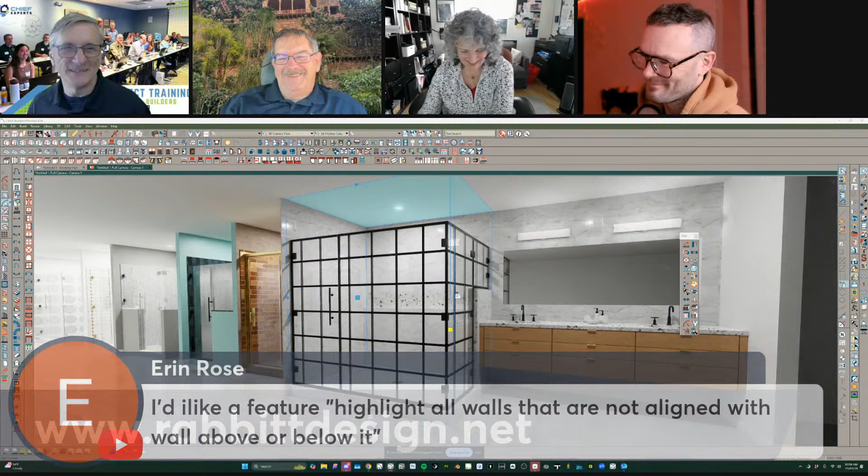Where'd it go, Erin? Oh, it's one up there. I'd like a feature to highlight all walls that are not aligned with the wall above or below it, and then a button to align them all would be great as well, to do them all at once.

We do have that so we can see if they're aligned right by using the floor reference tool, and if you click on a wall it'll tell you if it's aligned with the wall above or below it, that kind of thing. But I suppose I wouldn't care if I just selected all walls and had one button to just align all.

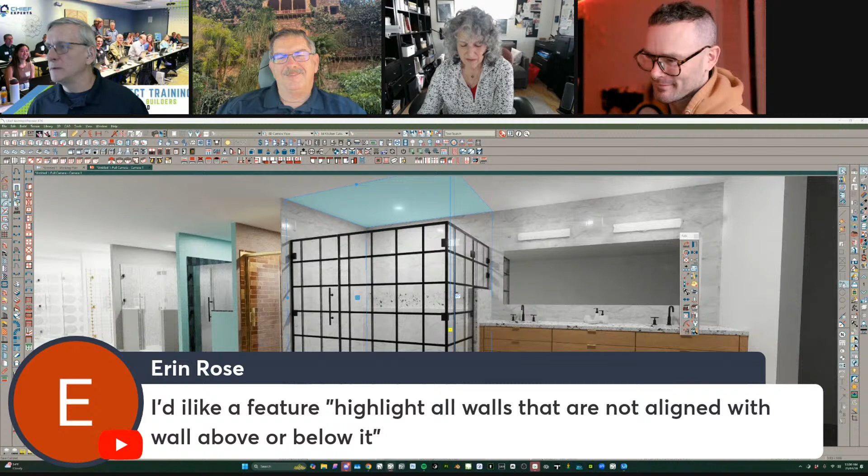Yeah, I'm with Erin on that one. But Erin, stop screwing up, just get them aligned right to start with. Quit messing around, stop pulling them. Dimension them into place. I love it, you can almost do that, great.

Anyway, cool, this is good. It's there when you group select walls. If there's more than one wall out of alignment, it brings up the icon but doesn't do anything. Oh, can you? Here, I'll show you. Rene, you need to stop sharing your screen. I can't get them off of there. There we go. So you're selecting more than one wall?

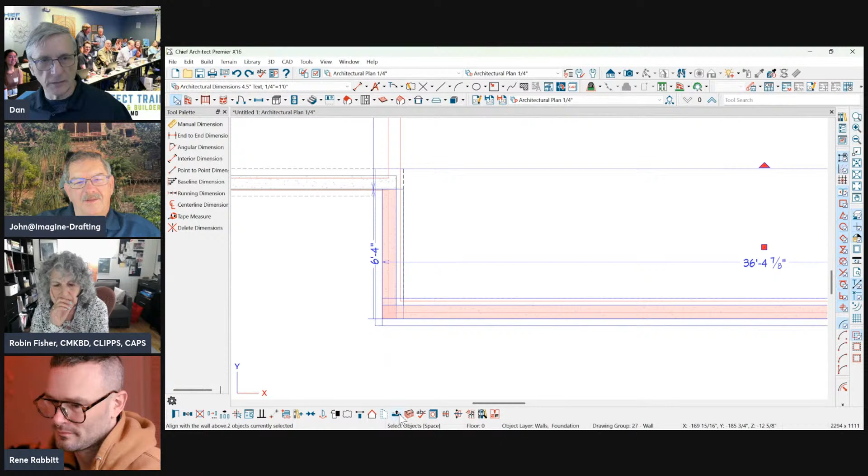So I have these two walls that are not aligned, as you can see. I can group select them, here's my alignment tool right here. I can select this one and I still have my alignment tool, but it doesn't do anything when I select another one. See, that one's aligned, now I lose the tool. So anyway, it works on one wall at a time. The align button doesn't do anything when you have both selected, it's there but it doesn't do anything, it's kind of remembering the first wall you selected, but it doesn't do anything. Oh well, that's okay.